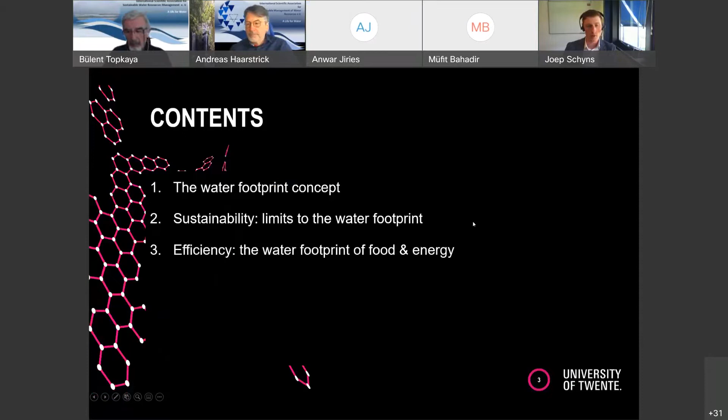So what I'd like to talk to you about today is first an introduction of the concept of water footprint. Then I'd like to move into the topic of sustainability. What are the limits to our water footprint? Then about efficiency. How efficiently do we use water? Water for food and water for energy.

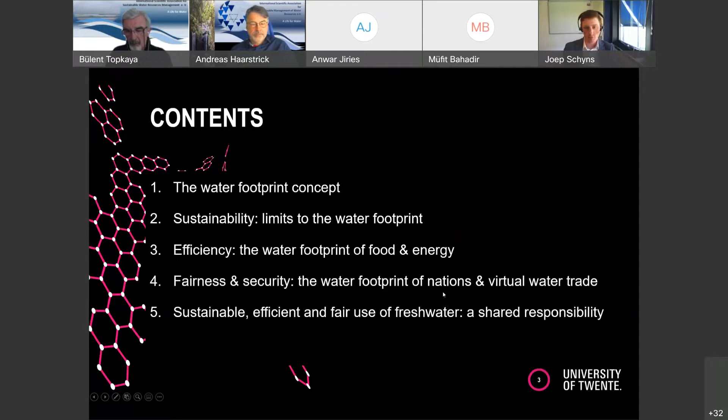Then talk about the fairness and security of our water footprint, specifically the water footprint of nations, how it differs, and the virtual water trade between nations. And then lastly, talk about how we can actually transform towards more sustainable, efficient, and fair water use, what can be done about that, and who can act. So let me jump into the first topic, the water footprint concept.

The basic idea behind water footprint is that water overexploitation and water pollution relate to what we consume. And because we are living in a globalized world where goods are traded internationally, the production and consumption of goods take place in different places. It also means that we are consuming and polluting water to produce products that are exported to other parts of the world where they are consumed. So production and consumption are disconnected.

And there are some countries who are actually benefiting from this, importing water-intensive goods, thereby saving water domestically. But on the other hand, it also creates a water dependency for those countries. As was already introduced, the water footprint concept was coined by Professor Arjen Hoekstra in 2002. He was inspired by the idea of virtual water, coined by Professor Tony Allan. Actually, both of them passed away in the past 3 years, which was very unfortunate, the two main founding fathers of the water footprint concept.

Arjen Hoekstra based the water footprint concept on 4 foundations. One was the notion that fresh water is a global resource because we use water to produce goods that are traded internationally. The second idea was that fresh water is a renewable resource, but the renewal rate is limited. Every year we have precipitation on the globe, but the amount we get in a certain place in a certain month of the year is limited. So it makes sense to talk about limits to how much water we can use in a specific place, in a specific period of time.

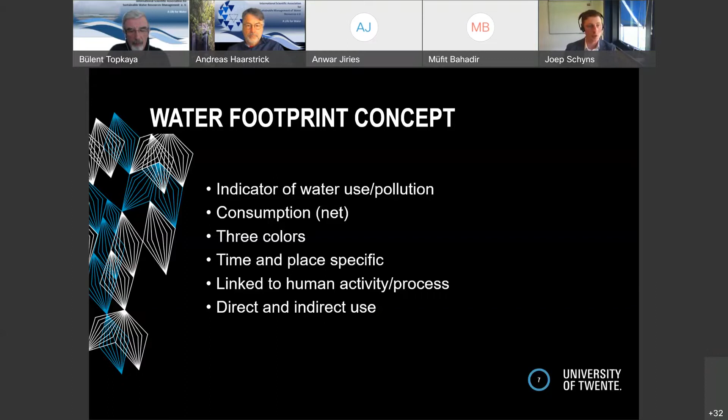So very briefly about the 3 different colors that we consider in water footprint accounting. That's green water, blue water, and gray water. Green water is the volume of rainwater or precipitation water that either evaporates from crop fields and from forests, or is incorporated into the product.

Blue water is about the volume of surface and groundwater that is consumed. So therefore, we differ from the classical indicator of water withdrawal, because the difference between water withdrawals and blue water footprint is the return flows.

And the gray water footprint is a volumetric measure of water pollution. So it is measured as an amount of water you would need to dilute a certain pollutant such that ambient water quality standards are no longer violated. And this is done in a volumetric way, so it can enter the discussion of water scarcity and also express water pollution in a volume similar to water use.

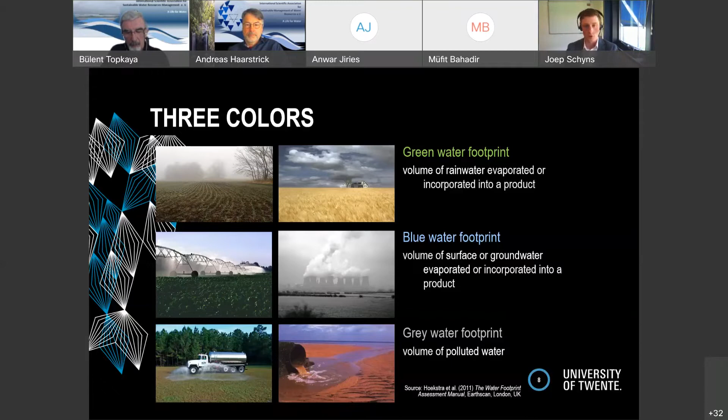And at each step, there's a direct water footprint that is needed, in this case to produce the feed crops, in this case to manage the farm, to give the animals drinking water. But between those steps, there are indirect footprints that feed from the direct water footprint from the feed crop cultivation. For example, feed is an indirect water footprint for the livestock farm, which depends on feed imports from Brazil in this case.

Now, another question on Wooclap. Which step in the value chain do you think has the largest water footprint out of these 5 steps?

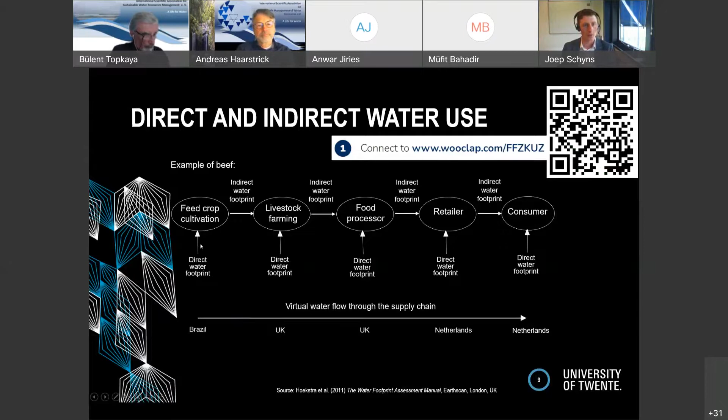Now, do you have any idea how large the water footprint of beef is? The global average value? Just a ballpark figure. Nice variation in the answers, but the correct answer is 15,000 liters per kilogram of beef. And that's mainly green water. So as I already said, around 85% relates to the feed crop cultivation phase, and it's mainly about the rainwater that is evaporated from the crop fields.

And you can wonder, well, green water, who cares? It's just rainwater, it's free. Well, we also account for green water because it does mean that we appropriate this green water resource, in this case for feed crops, to actually feed cows for human consumption. We could have also decided to use that green water for other purposes, to grow crops directly for human consumption, which would be more efficient from a water perspective.

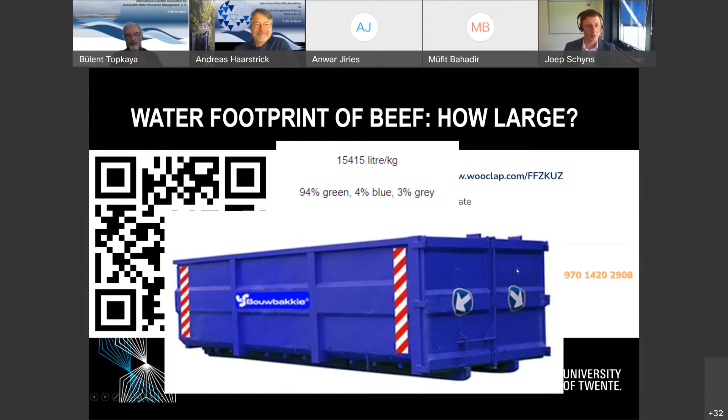And from there on, we can start to sum that water footprint of different processes and aggregate it to different levels. For example, we can take the production perspective or the geographic perspective and calculate the water footprint of all the activities in an area, or of all the activities in a larger river basin, or for that matter, all the activities on the world. And then we can talk about the water footprint of global production. So this is the production perspective.

Another perspective is the consumption perspective or the supply chain perspective. For example, we can talk about a specific product, the example of beef that we just looked at, and look at what is the water footprint if we sum all the different steps that were needed to produce this piece of beef. That's the product perspective.

You can do something similar on a larger aggregation level, for example, for a person or for a community, all the people living in the country that you live in. You can consider what do they consume, how much water has been used to produce the products that they consume. And if we sum that for all the people, all the consumers of our world, we arrive at the water footprint of global consumption, which is actually equal to what we produce on a global level.

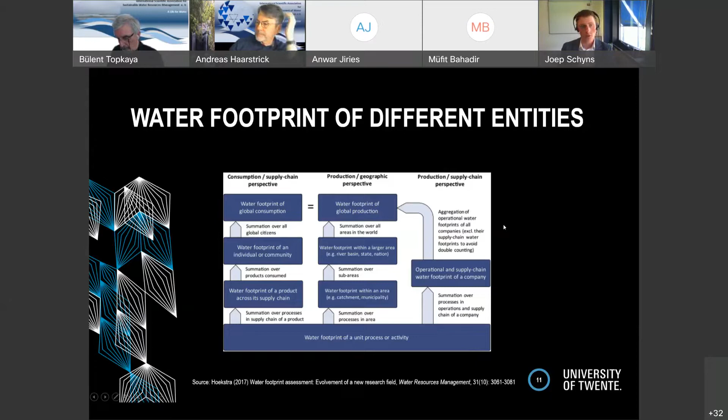So the water footprint was coined in 2002, and it gained more and more interest in the years thereafter. Also, a lot of corporate interest, which ultimately led to a push to develop a global standard for water footprint assessment. And this was published in 2011, and that water footprint assessment method distinguishes 4 phases. First, to set the goals and the scope of an assessment. Then to actually do the accounting, calculate the water footprints.

Then in phase 3, to place these water footprints in the context of maximum sustainable footprints, maximum sustainable levels to green water use, blue water use, and gray water use. And then lastly, to decide in phase 4 how to respond to that. How can we reduce our water footprint and where should we focus our attention in doing so?

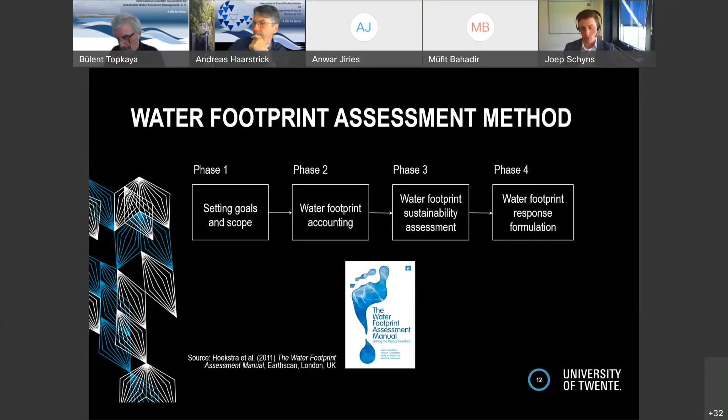And then talking about the limits to the water footprint, the sustainability part of water footprint assessment, I'd like to address with you how we are actually currently performing in terms of the global water footprint of humanity. But first, what are those limits? Well, if we consider a catchment, the ultimate source of freshwater availability in that catchment is rainfall. And that rainfall partitions into green water, evaporation or evapotranspiration, if you will, from the land surface, and into blue water, the runoff via surface water and groundwater resources.

Now, part of those flows of both green water and blue water, we should leave for the environment. We should leave part of the water in the river, the so-called environmental flow requirements, which subtracts from what we actually can use, leaving a certain amount of blue water availability or maximum sustainable blue water footprint.

And for green water, I have argued during my PhD, you can do something very similar. You also cannot use all the land and all the green water resources attached to that land to produce things for humanity. We also need to set aside certain parts of the land and reserve them for biodiversity conservation. So you can also talk about environmental green water needs, leaving only a smaller fraction of green water availability for humans to use. And those translate into maximum sustainable green and blue water footprints.

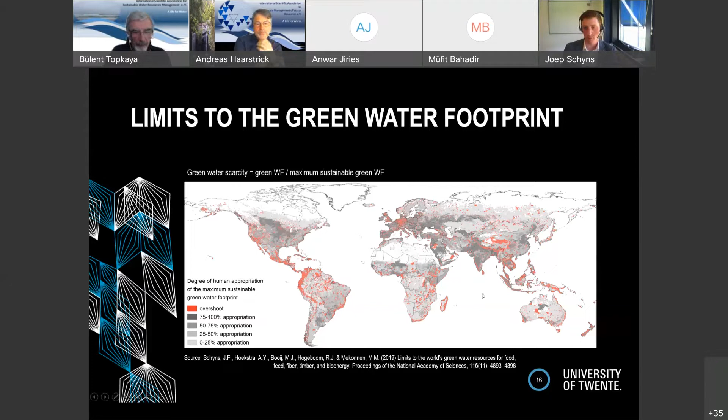There's also a maximum sustainable greywater footprint. And recall that the greywater footprint was measured as the amount of water that you would need to dilute pollutants to such a level that they no longer violate ambient water quality standards. So if we actually look at how much water is available in a river to dilute pollutants, we're talking about the actual runoff in a river. So our actual runoff is a maximum sustainable level to our greywater footprint.

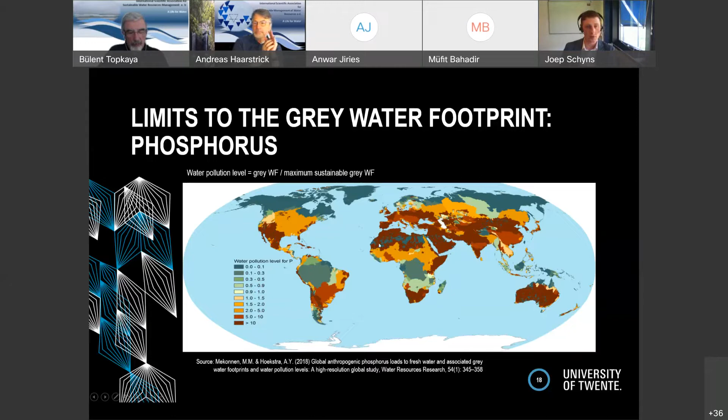Then I'd like to move on to the third topic, and that is efficiency. How efficiently do we use our water for producing and consuming food and energy? And first, I'd like to start with food. But to give you an overview of how much water we actually use for our daily consumption pattern, here is an example from a study we did for the European consumer, where we see that on average, the European consumer uses 5,000 liters of water per person per day. And 74% of that relates to the food that we consume. 26% relates to the energy that we consume and the water that is used to produce that energy. And less than 0.1% actually relates to the water that we use at home for showering, for cooking.

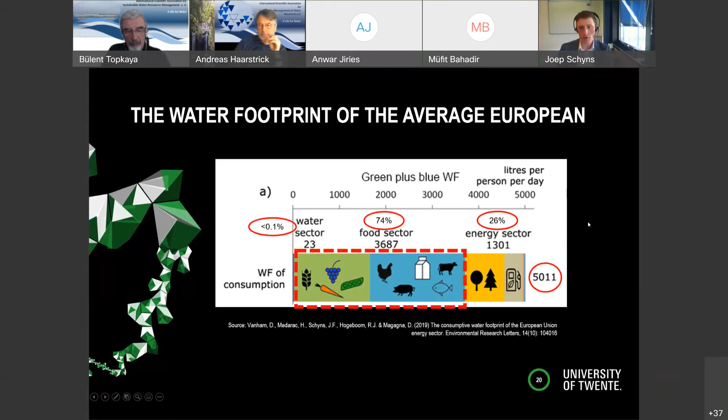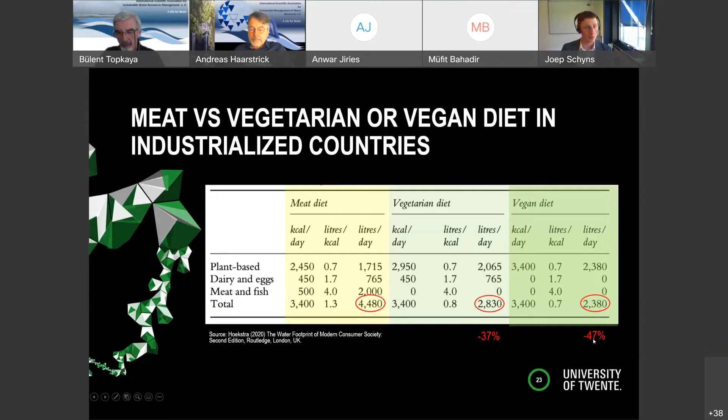So often it is heard that we should reduce our water use at home and shorten our shower. Well, you can put it into the context of the food that we consume, actually. If we would entirely stop showering, we could save 50 liters of water per day. But considering the amount of water that is in the food that we consume, you could actually make much more of a difference by changing your diet.

For example, if for one day a week you would leave a hamburger aside and choose a plant-based alternative like a soy burger, it has been estimated you could save about 800 liters of water. So that puts it in perspective. But don't get me wrong, shortening your shower is a very good idea because it saves energy that you would need to heat up your shower, unless you shower cold.

And energy also consumes water. So as I said, for the average European consumer, about 26% of our water footprint relates to the energy that we use. And it makes quite a difference from what sources we extract that energy. So in this study in 2015, my colleagues estimated the green and blue water footprint of different energy sources.

So firewood, which we burn for heat, and for example, we use that heat then to generate power. Hydropower, which also has a water footprint because we have created artificial reservoirs that weren't there in the first place, which now evaporate water from huge surfaces, therefore also contributing to the blue water footprint.

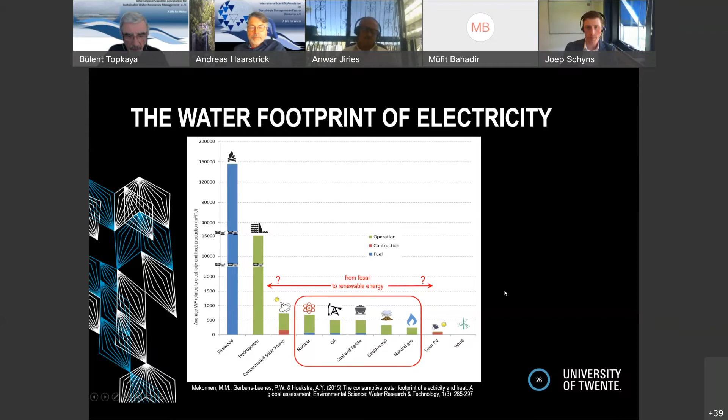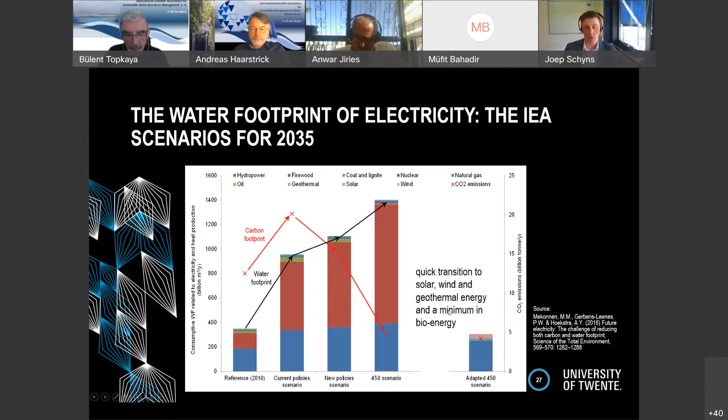So how are we in the time? Okay, good. It's okay.

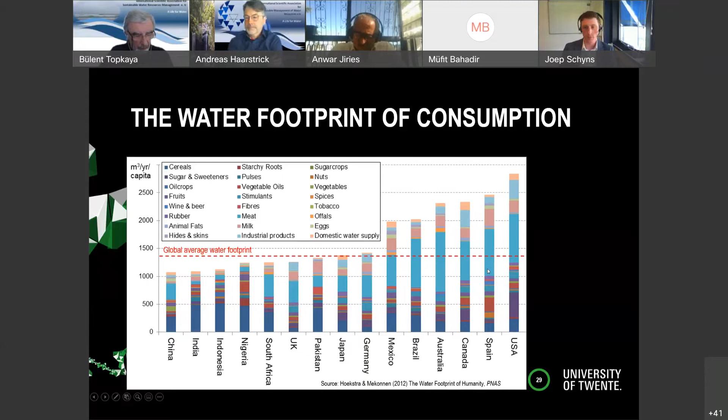So what does this mean? Well, if we currently look at the water footprint per person in different countries, the USA is here. And China, as the most populous country of the world, is here. If we would simply do nothing and keep business as usual, probably in the US it will go down a bit, as water efficiency in agriculture can be expected to increase a bit as yields increase. However, in China, it is expected that people will more and more adopt a different diet, one with high protein and low carbohydrates, therefore maybe increasing their water footprint per person a bit.

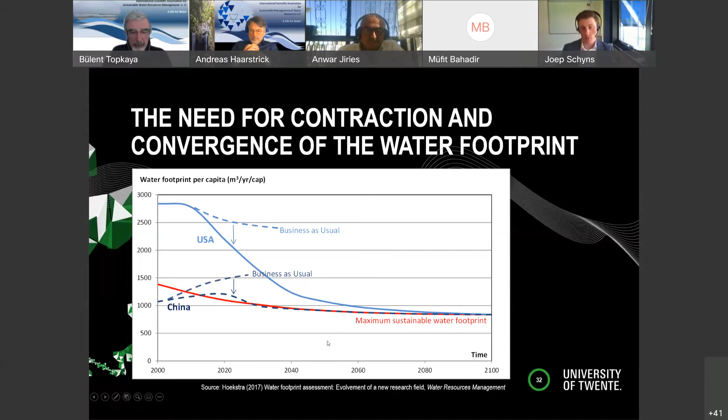Then what about security? Because we are virtually trading goods and services, we are virtually trading water, which actually creates water dependencies, global water dependencies between nations. It was estimated actually what are the main virtual water flows and who is net importer and who is a net exporter of water.

And then we find that there are a couple of main net importers of water, which are mainly in the Middle East, North Africa, Mexico, Europe, and Japan. Those are the yellow to red countries on this map. And there are a couple of main net exporters of virtual water, mainly in South America, the US, Australia, and India.

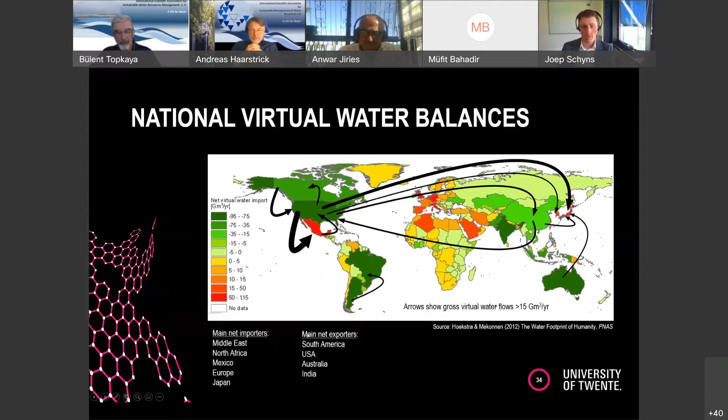And some of these net virtual water importing regions have significant external water dependencies. And this is then defined as the amount of their water footprint that is not located in the country itself, but abroad. And for the case of Jordan, that's actually 86%, which means they are very much dependent on external water resources. And Jordan is a case where they're actually also physically dependent on external water resources with upstream countries, but even more so related to virtual water, it turns out.

And then you can wonder whether it is a strategy of countries or necessity. I think for many countries that are pretty water scarce, it is also a necessity to import virtual water in order to maintain the diets that they have or that they desire. For other countries, it may also be a strategy to externalize their water footprint.

So let's talk about the case of the Netherlands, for example. This is the blue water footprint of the Netherlands. So related to all the products that people in the Netherlands consume, but it's spread all over the globe, as you see, related to products that we import. But this map was overlaid by the water scarcity map that we saw before. So we can actually say in which parts of the world is blue water used to produce goods for Dutch consumption in places where that blue water is used unsustainably, where we are actually exceeding the maximum sustainable blue water footprint.

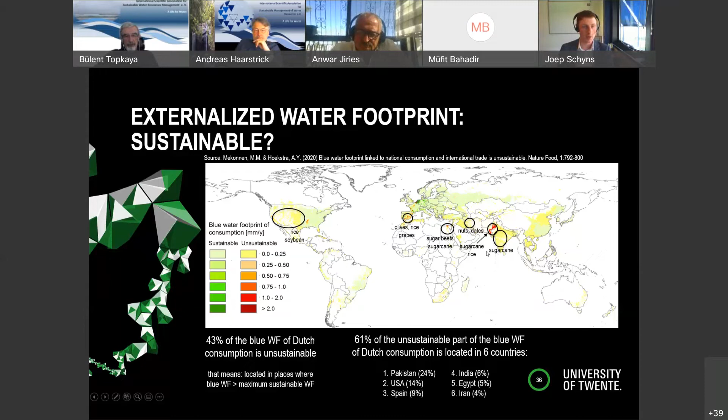And you also see where it mainly comes from. So for Morocco, it's largely also internally. It also relates to products to import from Spain, Syria, and the US. And, oh, sorry. And then there's also for other countries here, for Turkey, for example, 58% of the unsustainable blue water footprint is in Turkey, but it also relates to imports from the US, Turkmenistan, and some other countries.

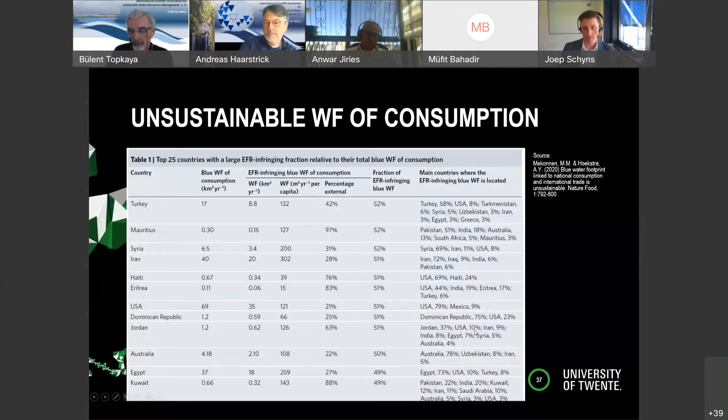So we talked about sustainable, efficient, and fair use of fresh water. Now, what can we actually do about that? Do we have some ideas for that? Well, to improve our environmental sustainability of our water footprint, the target should be to reduce the water footprints in catchments to sustainable levels of water use. That could be done, for example, by agreeing on water footprint caps that would need to be set by river basin. And after this slide, I will show you an example of what I mean with those caps.

Talking about efficiency, we could set targets, we could set benchmarks for the water footprint of products. So what are reasonable amounts of water use to produce a certain product? Talking about fairness and social equity, the goal should be to agree internationally on what are fair water footprint shares per community. Are those equal? Maybe not. Well, that's something that should be up for debate. What are fair shares by nation?

And in terms of security, well, there's of course a trade-off between importing water to save local water resources, but also the import dependency that you create by that, and whether that's wanted or not.

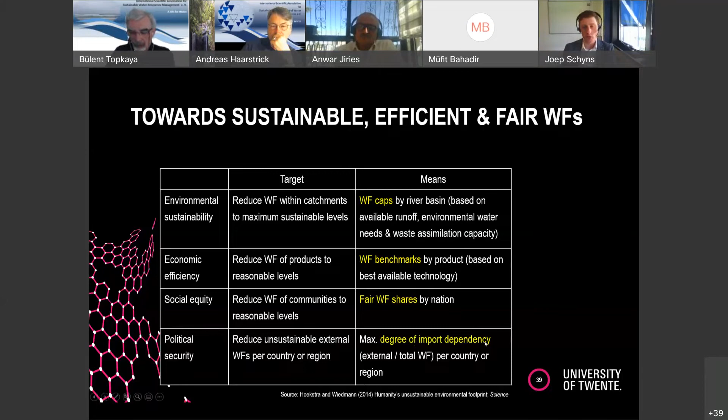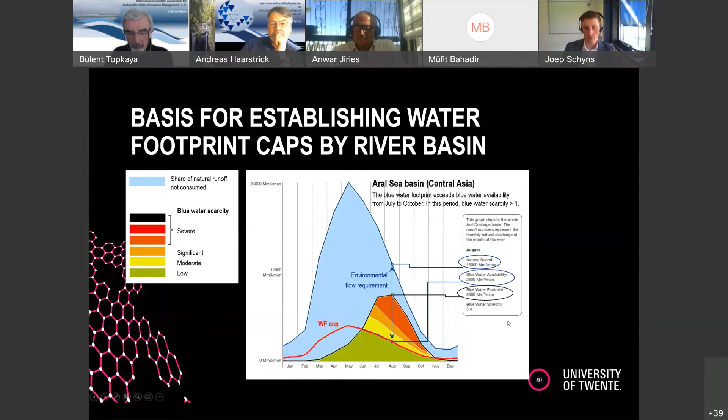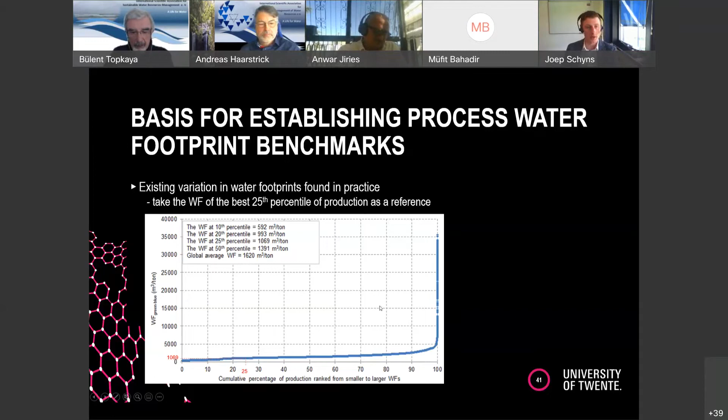This is just a very ballpark starting figure because you can imagine that it also depends on where you are on the globe. What are your production potentials? So maybe a better way to set benchmarks is to look at best available technologies in each place. For example, how much water could we save if you move from current practices to drip or precision irrigation, or to organic farming with less pollutants entering the water, or in case of industry, to move to full water recycling and closed cycle cooling.

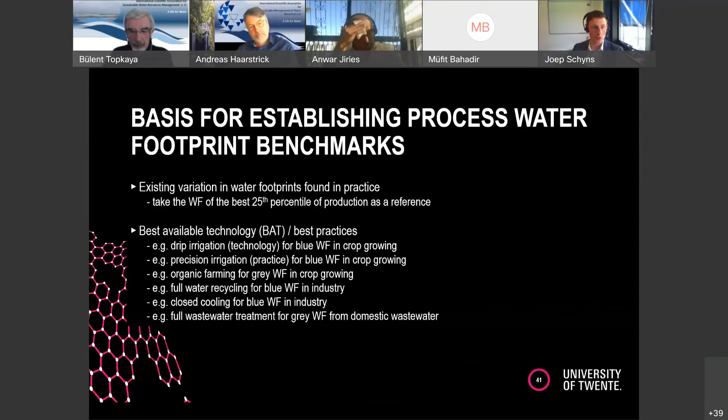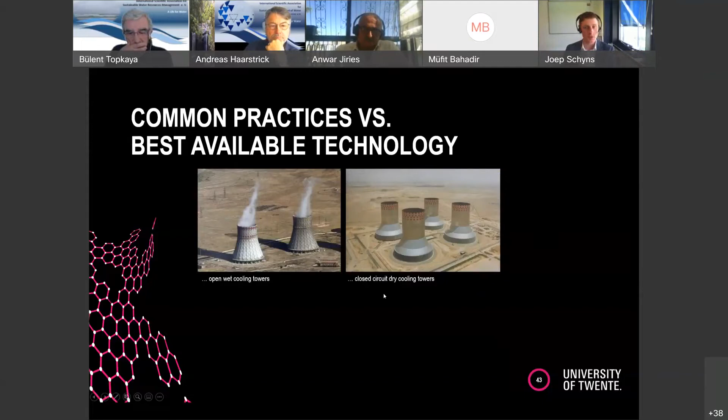So a couple of examples. For example, common practice in irrigation is sprinkler, though a much more efficient form to reduce your water use is drip irrigation. And in terms of the amount of water that is polluted, or the amount of pollutants that reaches groundwater, organic precision farming would be a best available technology compared to spraying pesticides. In the case of industry, like I said, moving from open cooling to closed cooling systems could make a big difference. And in terms of water quality, it's about treating water, which is still not common practice in many parts of the world.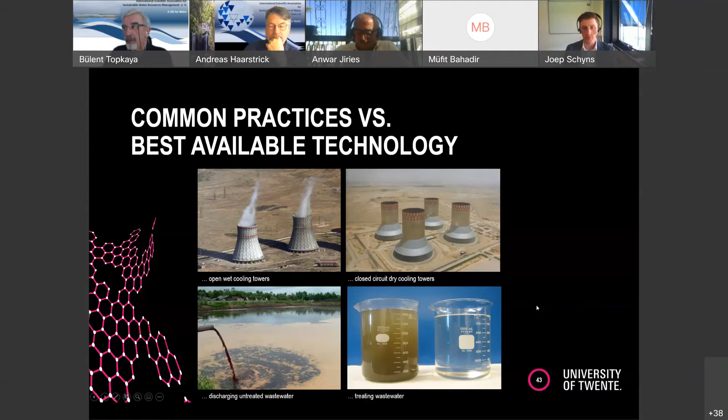So what can we do? Well, different people have different responsibilities and opportunities to act. For example, governments can take a role in taxing products that are water intensive and are coming from water hotspots. They can also be the front runner in installing water footprint caps and permit systems. As direct water users, farmers, industries, also just people in the households, they can apply best available technology and simply be responsible of how much water they use.

But there's also supply chain responsibility that the water footprint points to. As consumers, we are in control of what we consume, how much we consume, and which products we consume. So we can actually make a change by making those daily choices. Obviously, when you're in a supermarket, you don't know yet what are the products with the largest water footprint or the most sustainable from a water perspective. So demanding product transparency from producers is also something we could do.

Companies carry, of course, a responsibility for their own supply chains, and they could cooperate with their suppliers to make agreements on setting targets, setting benchmarks for water footprint reduction. Similarly, investors that hold our pension funds and hold our savings, they can also make decisions. They decide in what to invest our money. So if investors would be more open about where they invest and would have clear water sustainability criteria by which they judge their investment decisions, that could also make a difference.

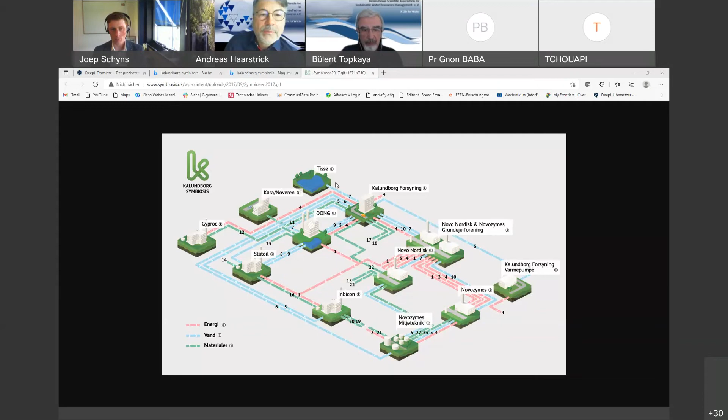Yeah, just to show. But let's now see what are the questions from the audience. Can I make a comment? Yeah, sure. I have raised my hand. Yes. But okay. Thank you very much, Joep, it was interesting, very nice. I want to make a short remark, a short comment.

I am living in Antalya. We have several 100,000 tourism beds. The tourism sector is very developed. And one of my colleagues, Handan Shahin, she is with us now, has worked in her master thesis on the water footprint of tourism in Antalya. And it was demoralizing, I must say, because most of these hundreds of thousands of beds are based on the all-inclusive system. And in this all-inclusive system the water footprint is several times higher than normal people living in Antalya.

Now, you mentioned fair water footprint. How to decide it now? So if you are living in a high-income country, in Germany, Holland, England, and so on, you pay a couple of €100 and then travel, this is also carbon footprint, to the Med Sea region, for example to Jordan or Egypt or Antalya, and then you cause a considerable amount of water footprint. We are facing this problem year by year, and every year we are talking about it, but it is not possible to reduce it or to take any precautions against it. It is a fact. It is a problem for our regions, for all the MENA region, I must say.

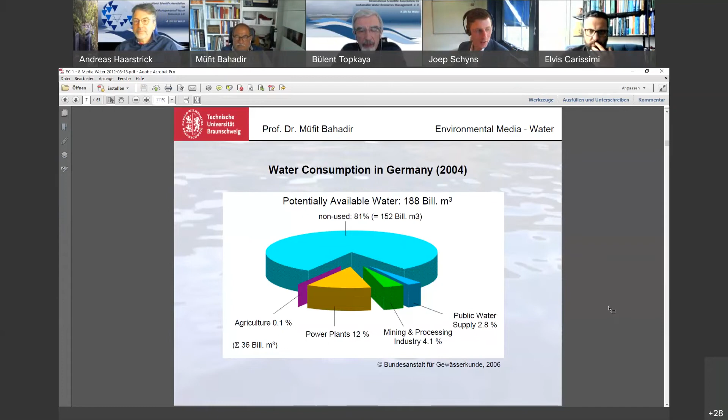So that means it would help if the German people would buy local products instead of importing food. Yeah, for the case of Germany, that would be one of the solutions. Although not all imports are bad, of course; there are also water-sustainable imports. Actually, after this talk, I will share a link to a study on the water footprint of German consumption if you're interested. I have to look up the link and I can share it with you.

Okay, thank you. From Antalya, for example, we are exporting tomatoes to Germany. It means also that the amount of water which is needed for the product is also exported to Germany without any payment. But this is virtual water export. Yeah, indeed, they only pay for the tomatoes, and as long as the water over-exploitation is not factored into the price of the tomatoes, then they are indeed not paying for that.

Yeah, similar. You already mentioned in the beginning that I did a case study from Morocco a while back. There, tomatoes are also one of the big export products to the world market. And indeed, in many cases, they're over-exploiting blue water resources to irrigate tomatoes, which are then exported to the world market. And well, there's no good or bad in that. It's just what our footprint assessment shows. Apparently the choice is being made to use and partially overuse Moroccan water resources to generate income from export.

And the idea is to give these insights into what the final end purposes are of what we're using water for, to generate a debate among, in this case, the Moroccan policymakers, to see: is this what we want, or do we want to change our policies? That's very important.